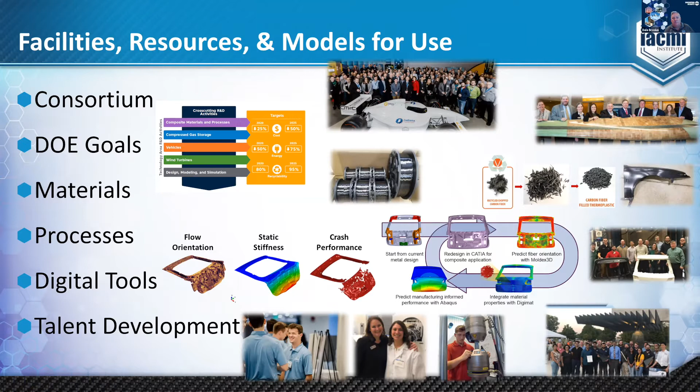We believe we're a connected community - this is the composites industry, and there's some pictures from various member meeting activities over the years. We're happy to say that we will be back in person in October in Dearborn, Michigan for our next members meeting, and we're looking forward to that. That's October 5th through the 7th, so we'll look forward to seeing folks there.

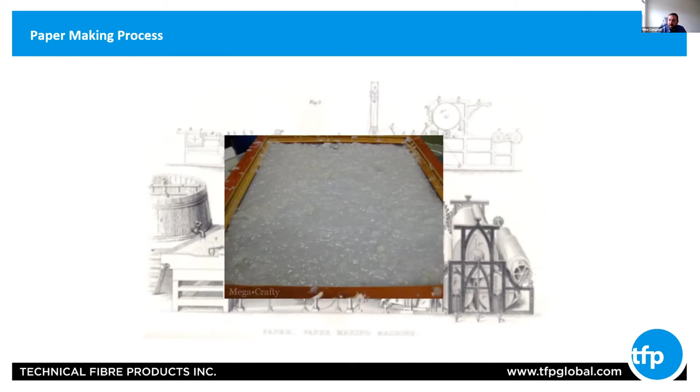As I mentioned on the previous slide, TFP was derived from a specialty papermaking company. Our nonwovens are made using a modified papermaking process. Here's a picture of pulp, a product derived from wood mixed with water - this is what gets fed into the paper machine.

In TFP's process, we have substituted the pulp for engineered fibers like carbon, glass, aramid, polyester, etc. We also use an organic binder to hold the fibers together. So that fiber, water, and binder mixture gets forced out of the head box and onto what's called the wire. The rest of the process is just there to remove water, and the last step is to reel it up. The reason I'm sharing this slide is so that you have a visual on the inputs and outputs of our process.

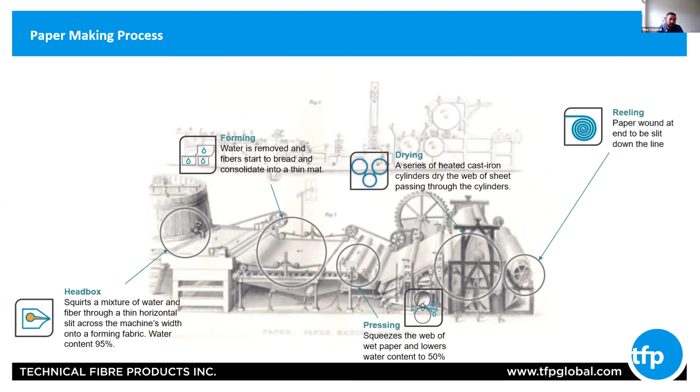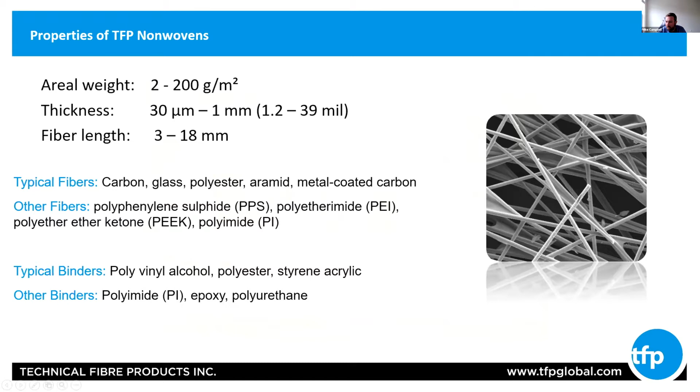So our main machine lines do not run a single product continuously. Every run is made to order. Veils are not a replacement for structural components. Due to the nature of the short fiber, the continuous fibers in the composite carry the load. In a typical composite project, our veils are in addition to your current layup to add functionality.

Our nonwovens are used in a variety of applications. Occasionally, or maybe even rarely, they are used on their own. So on a project like the Whitestone Bridge in New York, our intumescent nonwoven was adhered to the composite wind fairings with a self-adhesive backing.

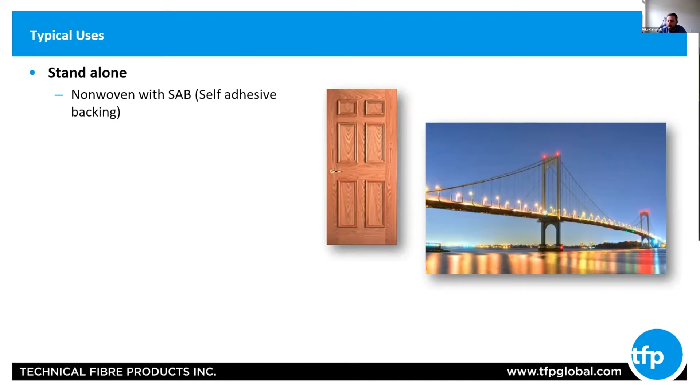Other times, our materials are coated with our customers' proprietary products. They range from adhesive resin systems to coatings used in hydrogen fuel cells. Today, I will focus on our nonwovens used in fiber reinforced plastics.

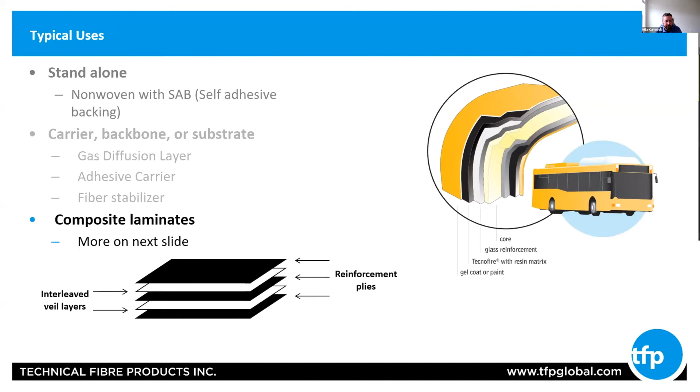So as I mentioned on a previous slide, our nonwovens are versatile. Ideally, our nonwovens are placed into your existing layup. Historically, the nonwovens have integrated well into both thermosets and thermoplastics. When utilizing a thermoplastic, we'll need to be conscious of the curing temperature. Here's a list of where our products have been successfully utilized.

All right, moving on to various functions that our nonwovens bring to the part. This is a condensed list of applications by fiber type, and I'll highlight just a few. So glass veils on the surface of a composite part provide a place for resin to evenly spread across the peaks and valleys of a woven product. Our customers use this when they see pitting or air bubbles.

Aramid is used on the surface of composite parts, not only to help with surface finish, but to also act as a protection layer. Aramid is very tough and protects from oversanding during production and from abrasion while the part is in use. Examples include the underside of an automobile, cargo containers, or pallets. On the next few slides, I will focus on intumescent and metal-coated veils.

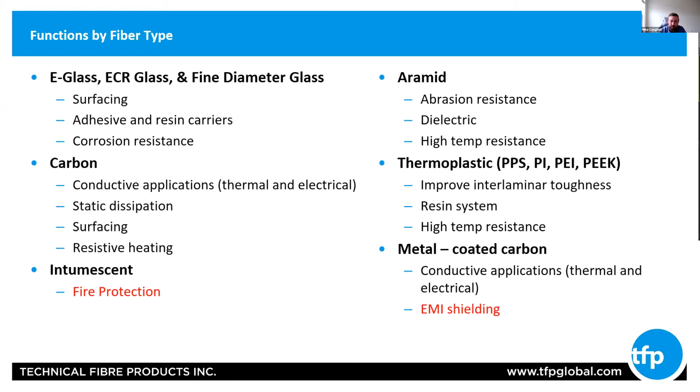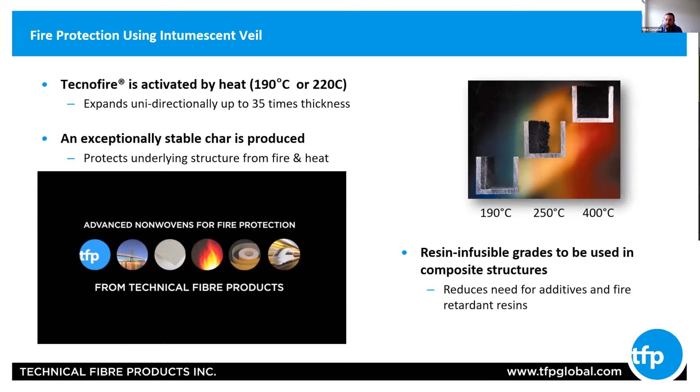All right, I'm going to start a video. Let's see if this works. So in this video, you will see a developmental product that has conductive fibers in the Tecnofire. It shows how the Tecnofire expands with heat. In this case, the heat is generated from electric current running through our metal-coated carbon fibers.

So you can see the graphite particles starting to expand here, the Tecnofire expanding. So this would be a before and after picture of Tecnofire. This char layer, as we like to call it, protects the underlying structure from fire and heat, and provides some insulation. And Tecnofire, like all of our nonwovens, is primarily built into a composite layup.

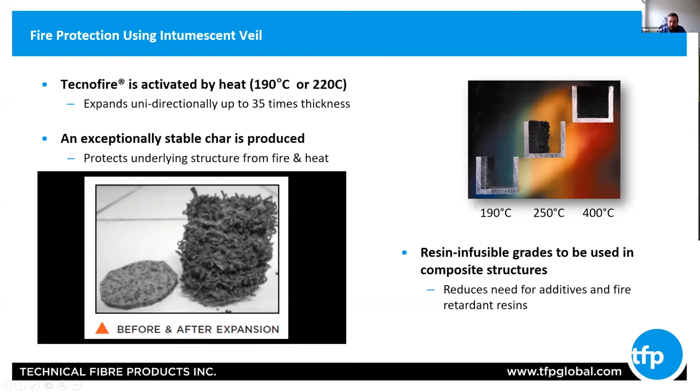So this is a commercial project where Tecnofire was added on the outside layer of a composite power transmission pole. This test here was designed to replicate a forest fire event while under load. The fire burned at 1150 C for 3 minutes, and the pole with Tecnofire was able to handle it.

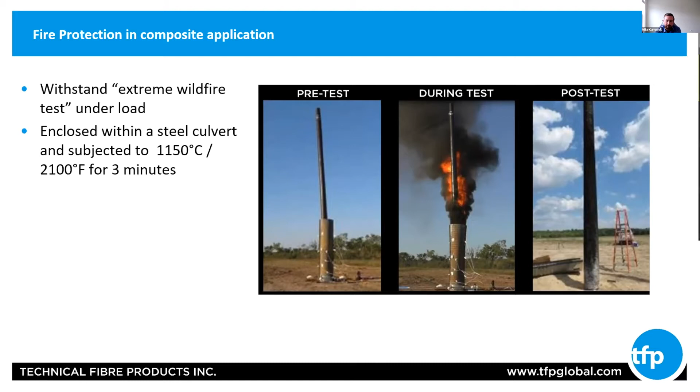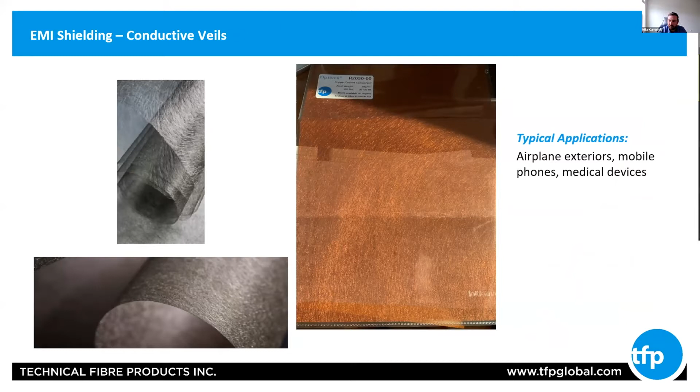In Schenectady, New York, we coat fibers with metal. These fibers get sent to our UK manufacturing plant, chopped, and used in our metal-coated veils. The standard metals that we use are nickel and copper, but we can also do silver, gold, tin, and specialty alloys.

We pride ourselves on having every single individual filament coated with metal. We do not coat our carbon veils after the fact. The filaments get coated before they get put into the veil.

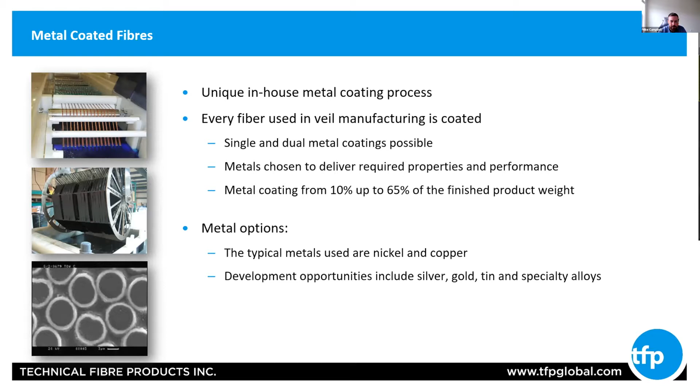So the primary application for metal coated veils would be EMI shielding for us. We are working with numerous organizations to bring a level of EMI shielding to battery enclosures. In the case of legacy battery enclosures that are typically metallic, which inherently shields from EMI, when switching to a composite, this needs to be thought of in the design process unless you're adding foils after the fact. So when working with these organizations, I'm hearing anything from 30 to 60 dB as the goal.

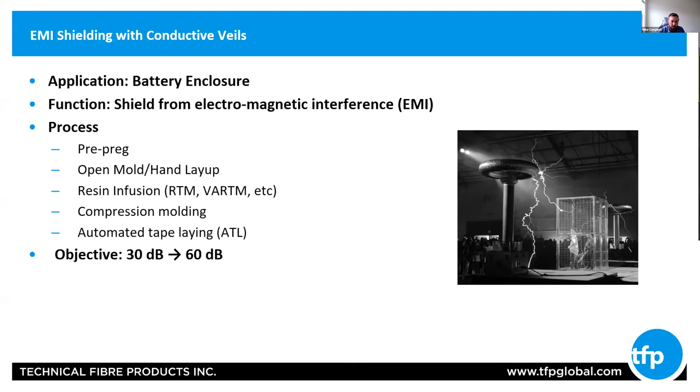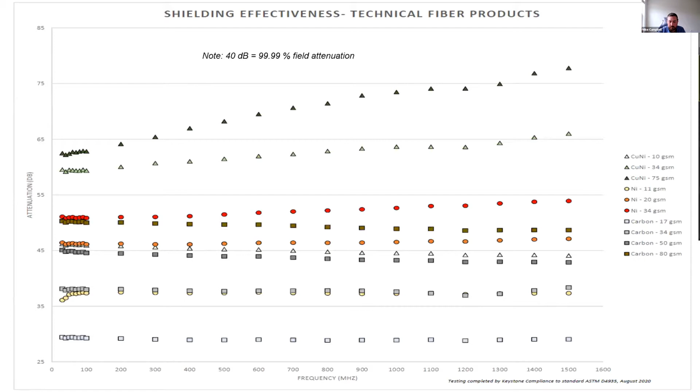All right, so my last main takeaway that I wanted to give you was that we want to collaborate. So we have a technical team comprised of highly educated and experienced chemists and materials engineers, whose main function is to work directly with our customers. We can help to identify the challenge. We can provide hand sheets in our lab for new materials. We also have a 20-inch pilot line that we can run new materials on as well.

So this here is an innovative list of concepts that we would like to collaborate on with IACMI members. So you've got resistively heated conductive veils. So by running electric current through the veil, it causes them to heat up. This could be applied to curing thermoplastics in situ, warming up the space of a passenger vehicle, or curing thermosets in a mold.

Inductive welding with conductive veils. So by placing the metal coated veil in very specific areas of your composite layup and applying a magnetic field, you could target areas to cure.

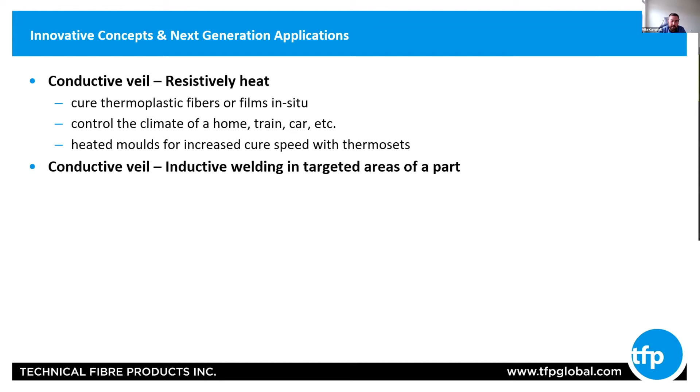Conductive intumescent veil hybrids. This would be a good example of how we can combine fibers to make a multifunctional material. Like in the video a few slides back, you could do this on a larger scale. An example of this would be fire doors in a hotel. Rather than passively wait for the fire to hit the Tecnofire and activate it, a fire alarm could activate the Tecnofire and aid in filling the gap between the door and the jamb.

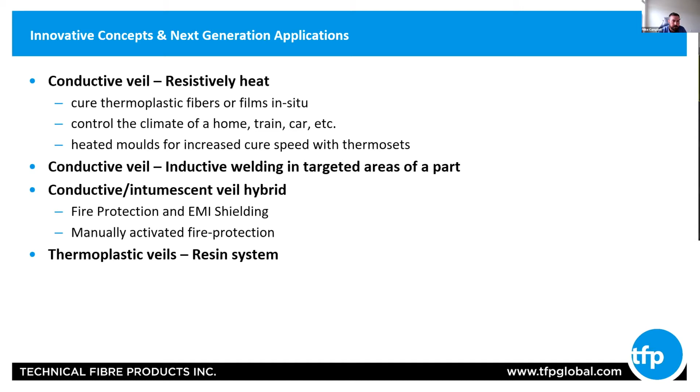Thermoplastic veils such as PPS, PEI, PEEK could be used in your composite layup and melted in place and used as the resin system. So again, my 3 takeaways for the presentation that I wanted you guys to have were: we're a material supplier, we specialize in lightweight, tailorable, functional nonwovens, and we want to collaborate.

So I had to throw in a picture here of our last in-person IACMI members meeting. This is me at the museum. All right, thanks for your time, everybody, and thanks, Dale, for having us out here. Thanks, Mike. Good presentation. I think that's you at the exit of the original Air Force One. It is, yep, at the Air Force Museum in Dayton. Great exhibit.

So a couple of minutes for questions if anybody wants to put anything into the chat, but I have a couple that I've generated. On the EMI shielding, where do you place the veil? Is it in the middle of the laminate, top or bottom of the laminate? Where's the best place to put it? So I think that'll come down to how you design your part, but at a coupon level, it should not matter. And we're actually doing a lot of testing here for some webinars and conferences in the future.

And unfortunately, I didn't have all the data ready, but we're proving that the veil in a composite, out of a composite, and in different layers of the composite, it is actually irrelevant from a coupon level. But when you're designing a part, you may need to think more about how you connect the veil to your gaskets or other parts there to make sure you have a fully enclosed Faraday cage.

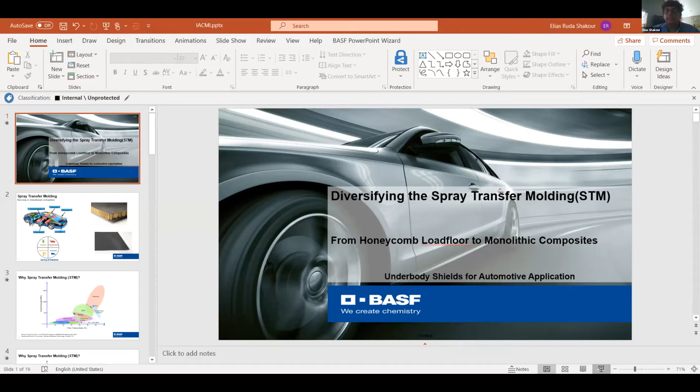Hey, thank you, Dale. Can you see my screen? Yeah, just put it in the slideshow mode. And yeah, just give me a second. How does it look? Good? You see it? Yes, looks good. All yours.

Good afternoon, everybody. My name is Elias Shakour, as Dale mentioned, and I work for BASF here in Wyandotte, Michigan. My background is in composites, so I represent a team that works in lightweight composites, mainly for structural and non-structural applications. My own focus is in the polyurethane application, but I have a colleague who works in the thermoplastic application, so we cover both sides.

Today, I'm going to talk about an application that is well known in the honeycomb load floor. We call it spray transfer molding, STM, but we're extending this application into the monolithic side of it, which means taking it to make more composite parts, where we see there's a big advantage for the high throughput that can make the integration of those parts in the automotive industry much easier than other processes. And I'm going to focus more in depth on underbody shields for the automotive application, where we have a partner that we're working with.

Now, with spray transfer molding, when we started, we were focusing on automotive and mainly load floors. But when we started to investigate more, we built a prototype lab here in Wyandotte that I will be introducing to you. There we looked into what else we can do and what kind of industries we can serve. And we believe with this technology we can serve several industries such as transportation, consumer, construction, and industrial, taking it from the honeycomb load floor in the upper pictures, which is really nice, high stiffness, high strength, to more of a monolithic composite part with structural application.

And it is important to mention that this technology, as I will show you in a minute, has an advantage of low cycle time. And that's the big advantage. I can have part to part within 60 to 90 seconds. And that's where we think this technology can be a good fit, comparable to high pressure RTM as well.

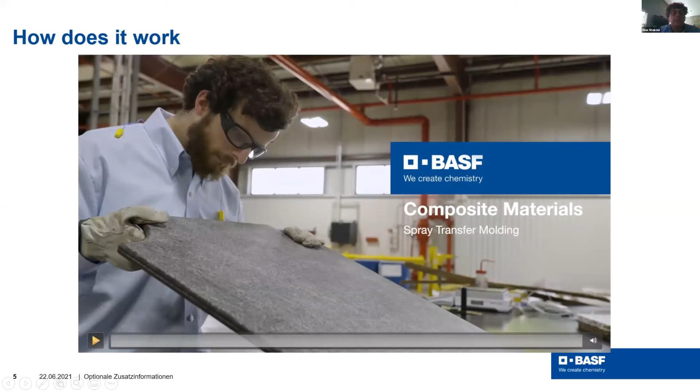Now, how does this technology work? Let me walk you through this video. This is a lab here in Wyandotte, Michigan. This lab is open for our customers to come and bring their tool or use our equipment and our tools as well to make parts and then go to the OEMs and get their business.

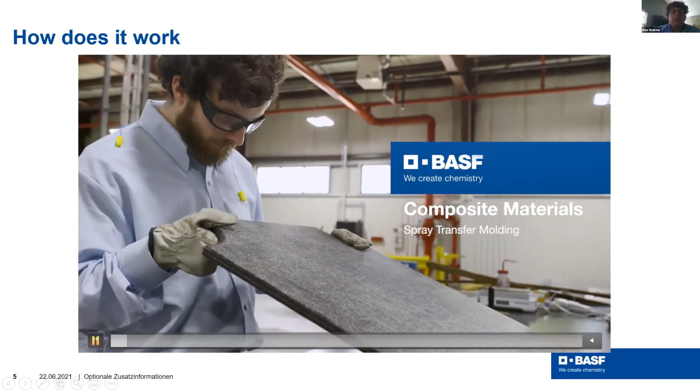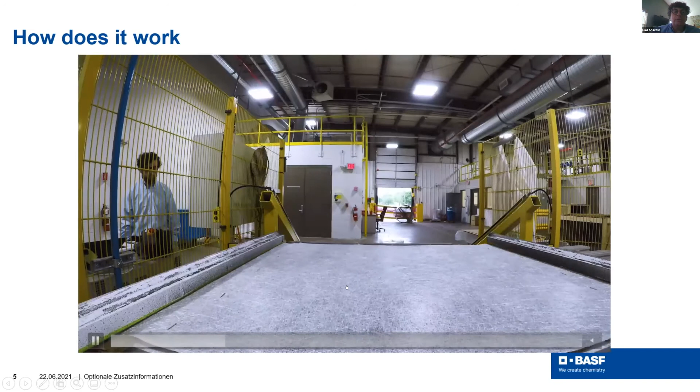So it is open for everybody to come in and utilize the equipment. This technology, let's go back now. This starts with a corrugated, could be paper, and then we add a glass fiber to it. It could be carbon fiber, it could be natural fiber where we start to use that. We make a plank out of it where you see the core, and then we write a program to localize where we want to spray. And that's the beauty of it. I don't spray places I don't want to spray on.

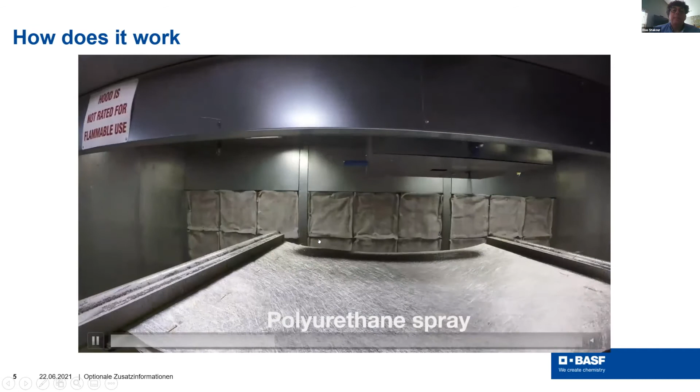And if you notice, I'm going to pause it for a second. I'm spraying in a 90 degrees. That means I'm not distorting the fiber orientation. In this case, this is a glass fiber, chopped glass fiber. But think about if I have several layups of 0/90 or quasi-isotropic material, I don't want to distort that, like similar to what happens in high pressure RTM. Here, I am spraying in high atomized pressure on top of the glass fiber, which I really localize the impregnation very well.

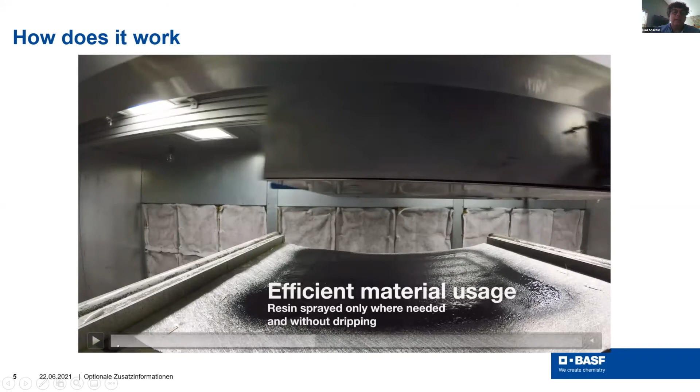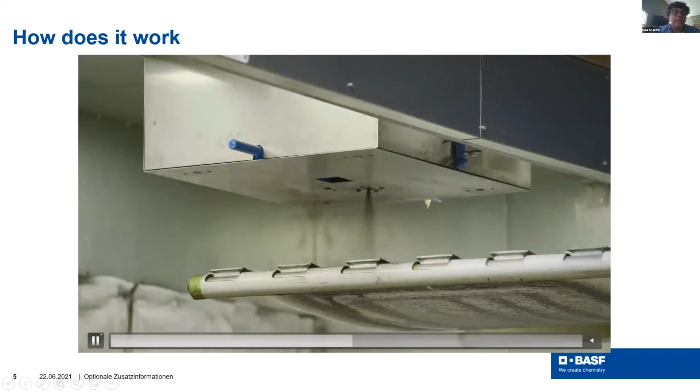I just want to say, on top of there, if I want to add more glass fiber reinforced localized, I can add that into the stream of the urethane, and it will stick to it, and it will be more localized into the glass fiber. Now I'm kind of creating here a pre-preg. As you see, we spray on both sides. In the industry, they spray both sides simultaneously. Once we complete that, this is about 20 seconds on 1 meter square parts. Then the robot will take it to the mold.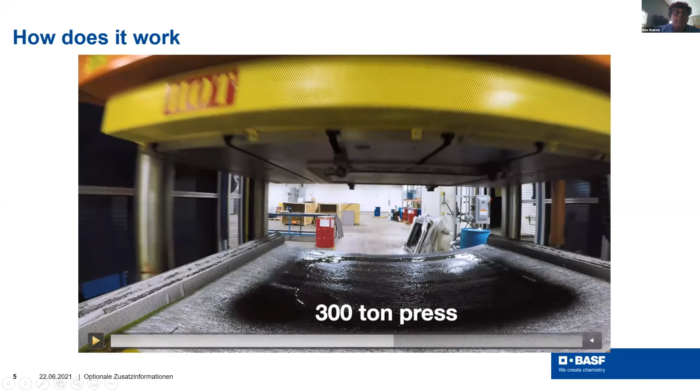And in the mold, we can add auxiliaries such as inserts, or I can put a veil or anything else. All will be fully integrated in the tool itself. And this will be in one cycle. We can accomplish having inserts, veil, or in-mold coating, and trimmed all at once in one cycle. And the tool is like the cheapest tool, because we don't need to heat it, similar to injection molding.

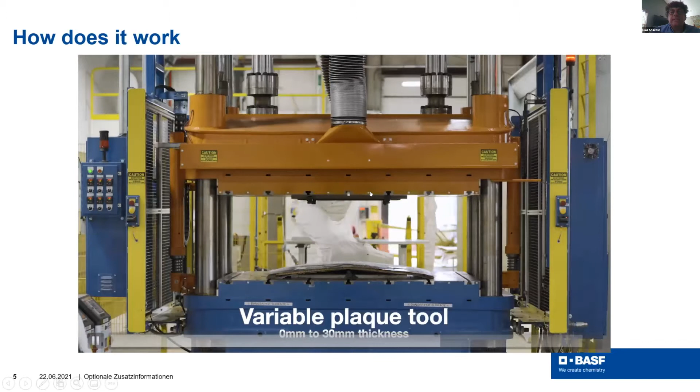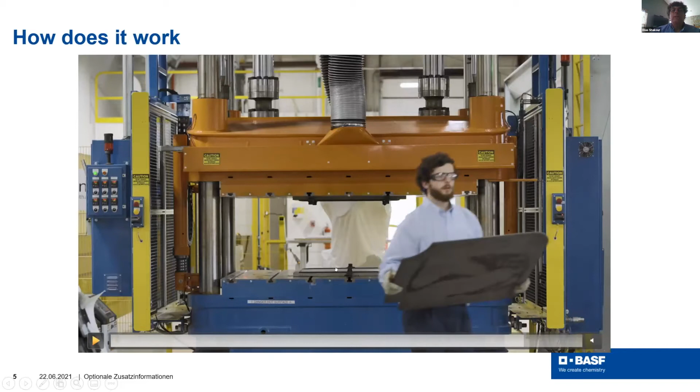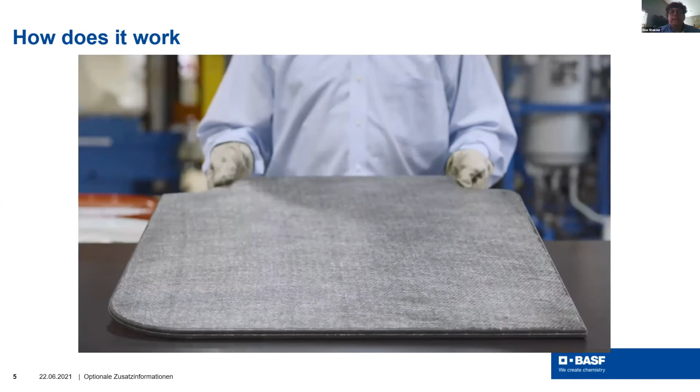As you can see how simple the tool, this is a heated platen, it closes, and by end of that cycle, demold, you will end having a finished part. So that's the beauty about it. It's fully integrated, so you can add several features in the mold and get a completed part. So this is like the traditional honeycomb applications. Now to go forward with that, what can we do? This is well known, as Dale one time told me, but we are extending this application.

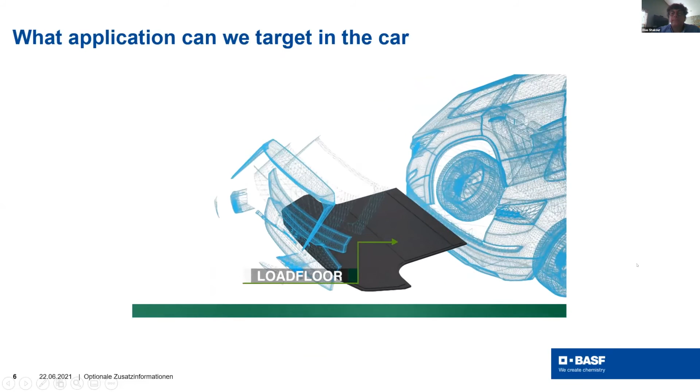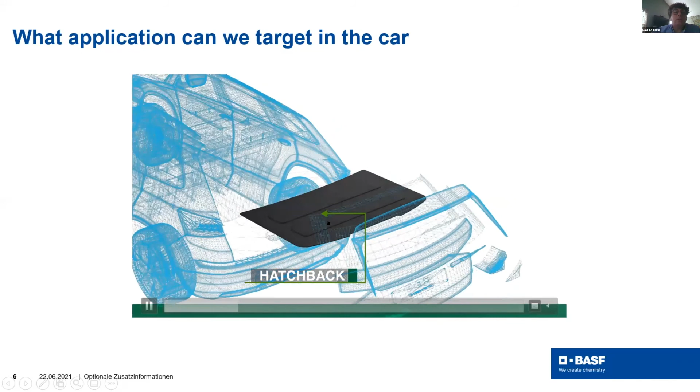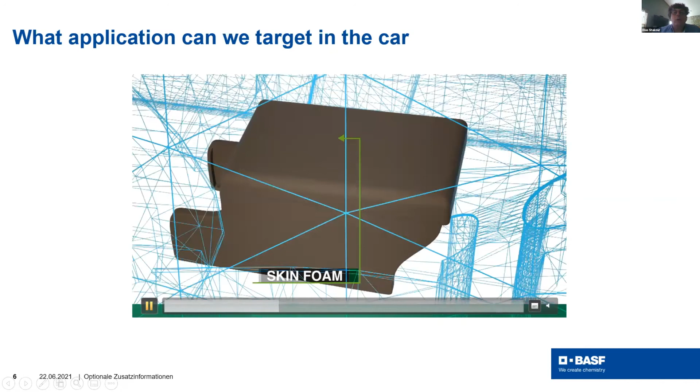So we did a roadmap, where can we apply those kind? This is where the honeycomb application comes in, but I want to show you more of the monolithic. As you can see, we can start from the load floors. This is the tradition, what's in the industry right now, and there are lots of customers and big volume. You can do the hatchback, that's a monolithic, or you can do it with the paper core. Center console, we are working with customers right now, and this could be natural fiber from jute, bamboo, or flax, with a core or without a core, and we can add skin foam to it as well, all integrated in the tool, but multiple steps though. Sunshades, this could be an option.

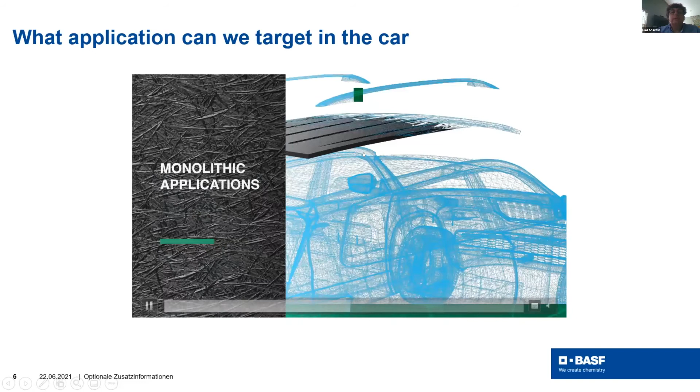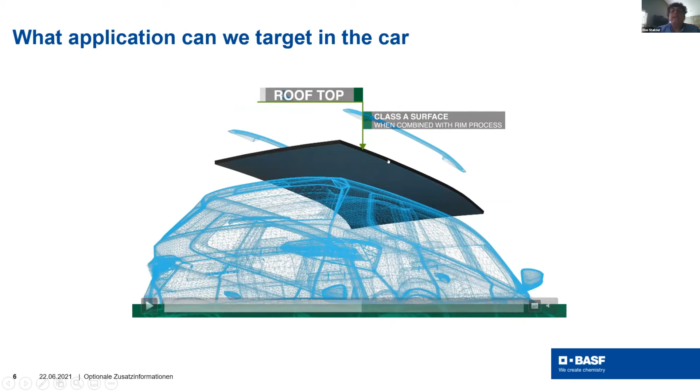Now, the next one is the monolithic. That means we take the core out. So you can do the rooftop. And I want to stop here. With the rooftop, you also can add veils on top, as mentioned, and we can combine it with the RIM process, so you can have different colors and be ready as a class A to paint if you want to paint that as well. Fender liner, that's another option.

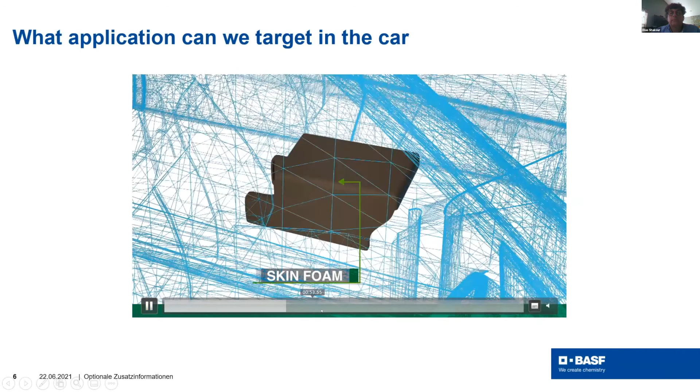And you can see here, oops, what did I do here? Sorry about that.

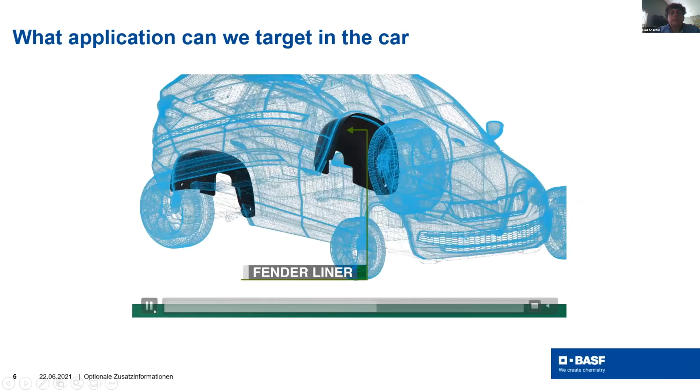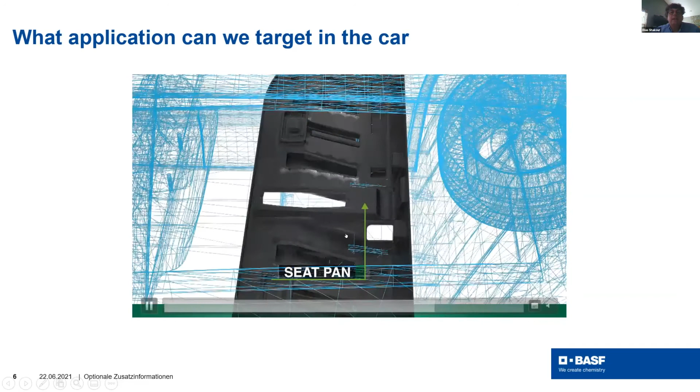So as you can see here, we're going into the extreme of, you would say, oh, that's a very complex shape, but I will show you the parts that we're making, and we can do that. Also door panels and door modules, that's easy to do. And it's lightweight, strength, everything. And we are working with customers on that. Seat pan, we have done that in Europe with BMW. And today I'm going to talk about the underbody panels and skid plates.

So this is another opportunity, and we're working with the customer tier 1 on that, but we're serving several OEMs on it. And this is a big opportunity for this technology. So eventually, if you can see it, we're taking that technology and we're stretching it to be more into the monolithic, but we're going to the exterior parts of the car. And that's where we think there's more opportunities.

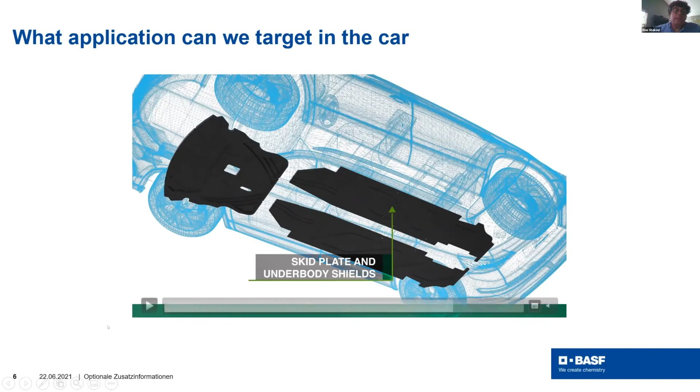We made this video, but we didn't add also in the battery side, and we have also been working on the battery cover and battery top for using this application as well. So all in all, we think this is where this application can be done. Some of those parts that we are talking about, we are making them for OEMs, and some of them we are still in the investigation mode, but all those are potential.

Now, if I want to go forward, let's focus more on the benchmark of the underbody, and this is work in partnership with the tier 1 CIE group here in Michigan. They're in Shelby Township, but they have an OEM customer, and they already identified the customer and are working on the part with them. So to start with, for the underbody, we did a benchmark or roadmap using A2Mac1, and we looked at all kinds of underbodies available.

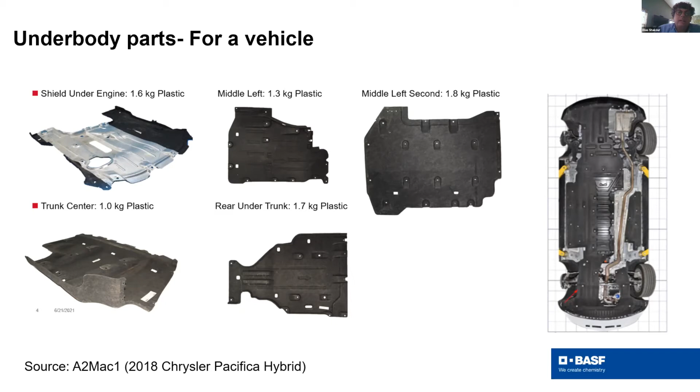And we found out, this is an example for the Pacifica. It is quite heavy sometimes. And not only that, if you drive on the highway you might see some of those underbodies thrown on the side of the road, because with the vibration, the joints there tend to break fast, and there are some issues. So we thought, if we want to go after this market, we have to provide a higher strength. Not only that, it will be a lighter weight.

So for this work with our customer CIE, we started with a coupon size, and then we will expand that to a prototype part. So we started by utilizing a polyurethane system that has the highest biorenewable content in the market. And we tried to go to the thinnest possible part we can make, which is 1 millimeter. And we did all the mechanical performance for that. So first of all, we were successful in making such a sheet, which is out of 450 gram per square meter of glass fiber.

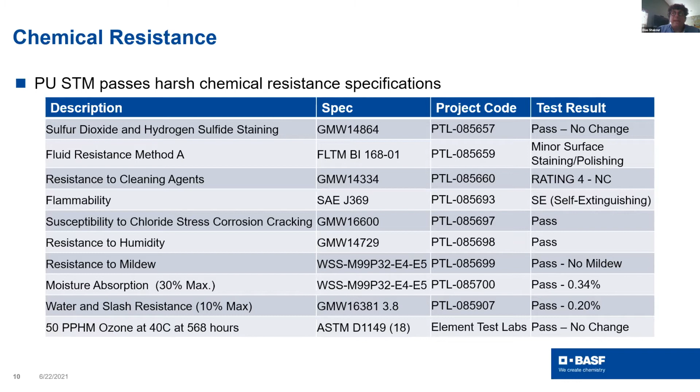Not only did we do the mechanical performance, we took all the specs that the OEM provides, and we did the chemical resistance for it. Those are the GM and the Ford and some of the foreign automotive specs that we all passed. That means all the specs passed the requirement. We did also gravelometer testing and also NVH testing. All of this is under the compliance of the specs that we received from the OEMs.

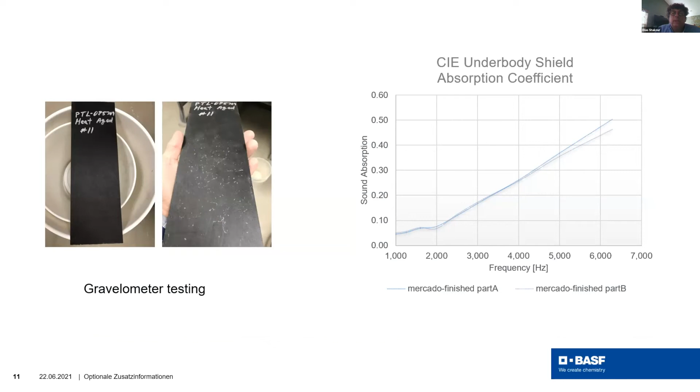We did different DOE studies, and we looked into what kind of glass fiber is needed for different impacts, to increase the specific energy and the impact energy absorption, and compare it to the carbon steel as the control. And you can see from this graph, 5 layers, 4 layers of 0-90 can really be a good fit to replace steel as well.

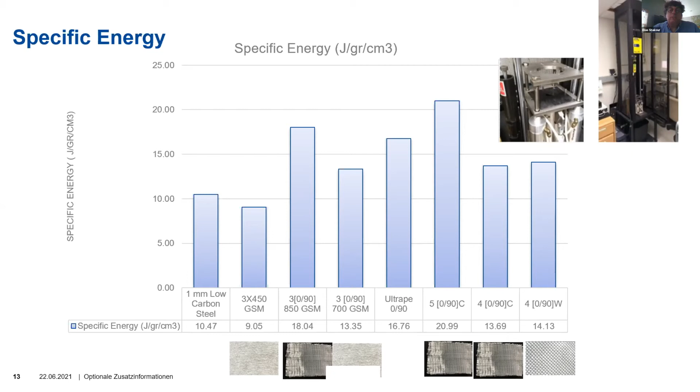Now, with all the specs that we have done and passed, now it's time to really work on the prototype. And this is the lab here in Wyandotte, and it's open for our customers. Please reach out if you are interested or you have a project in mind. We also have good CAE simulation skills with our groups so that we can identify how to optimize the design.

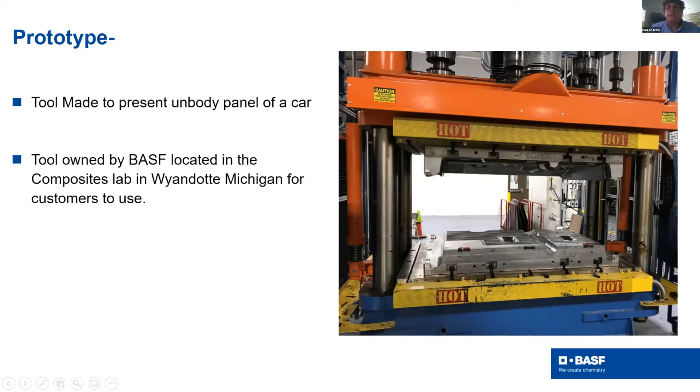This is a tool that we built. It is large, it's the maximum tool we can have in our press. It's about 1.7 meter in length and 1.5 in width. And you can see it has lots of geometry, and it has a corrugation. So it could also represent a truck bed as well, but it also has some features that you will see like trim edge and so on.

Once we completed, this is a complete part. And as you can see, it's so beautiful, because we really modified the spray to impregnate on those edges. You can see how it is well trimmed on the trim edges. This is all in one cycle, and that's the beauty about that. You can get the high strength.

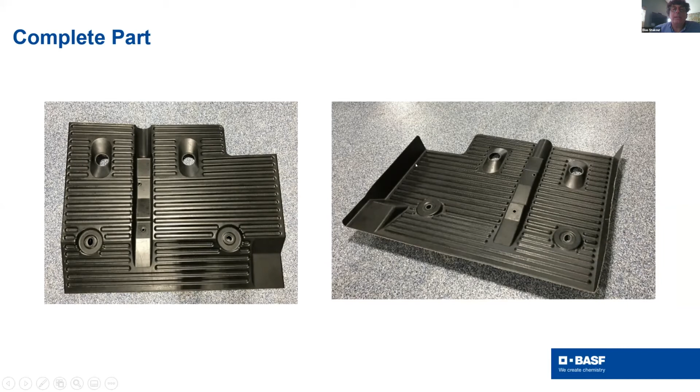Add feature into it, and yet get one cycle. With that, this is a big part, and you can see it has a complex geometry, lots of geometry features in one cycle.

As a conclusion, STM, spray transfer molding, is a good technology to manufacture structural and semi-structural composite parts. Eventually we introduced this technology to fit where high pressure RTM has long cycle time. We reduced the cycle time to 60 to 90 seconds.

So we're offering that as an alternative. We can make large parts, as I told you. Thickness varies - we were up to 5 millimeters without any problems. I just want to tell you this is a good technology for 3D geometry.

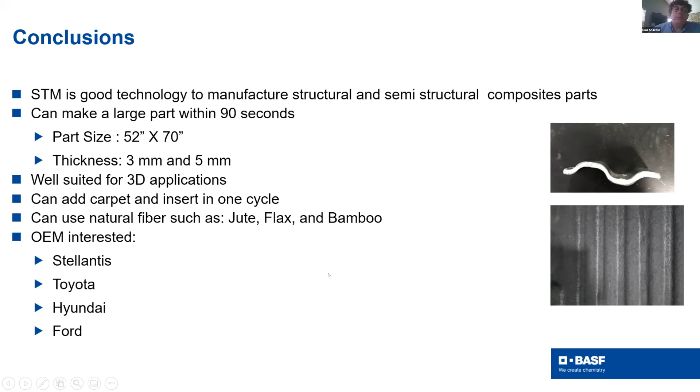From the lower picture here, you can see I incorporated a carpet, so you can add carpet to it, and that's for NVH. Or you can use like jute, flax, or incorporate even bamboo if you're interested. Who is interested, and who are we working with right now with the OEMs? Stellantis is one of them, Toyota, Hyundai, and Ford. Those are the target OEMs that we're working with through our tier, of course.

With that, I would like to say thank you, and I'm open for your questions. If you have any interest in visiting the lab, please contact me, and we can arrange for you to come and visit the lab if you're down here in Wyandotte, Michigan. With that, I would say thank you.

Thanks, Elias. Yeah, really interesting there. This technology's come a long way from where it used to be, simply for load floors and honeycomb panels.

Yes. So, one question I have - you didn't address this. You obviously talked about glass mats, and you talked about natural fiber mats. But what about recycled carbon fiber mats? Have you done any work in that? We did a lot with our tiers, and yes.

Funny enough, we started with the traditional polyurethane, but because of the nature of the recycled carbon fiber, we developed a new polyurethane that impregnates that very well. So we did that, we work with that a lot, and we have some data with them.

Okay, very good. What about thermal performance? What temperatures can you go to? I mean, do you have formulations that are e-coat capable or not? Or is that beyond the scope?

No, actually the system itself goes to 170 degrees TG. So it is e-coat capable because we're targeting exterior parts, and 170 TG is enough to hold an e-coat oven of 200 degrees for 20 minutes. It passes that. The tool itself is heated to 200, 230 degrees Fahrenheit, and we can adjust that based on different veils.

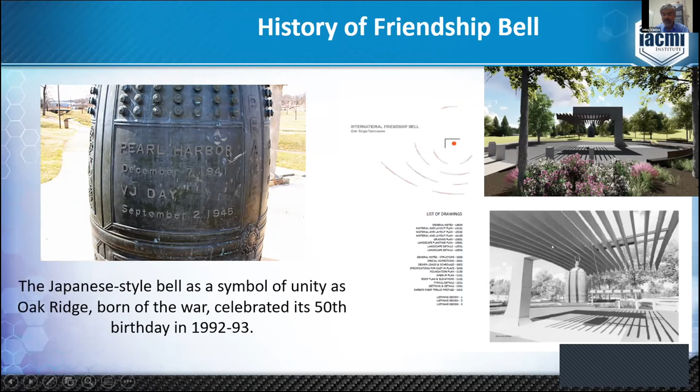And I think in some meetings up at the top level, they decided this has to be carbon fiber beams. And then we were pretty much told, hey, you are producing carbon fiber beams. So that's the history of this whole thing.

So the unique thing from an engineering standpoint is each of these beams is 33 feet long, and they're like 36 inches in height and only about 3 inches in cross section. So they're very sleek and slender, but they're very, very long, like 10 meters long roughly. And there are 17 of these beams that make up the entire structure. And this, I'll show you some images.

These beams actually mount onto a superstructure. The unique thing about this is the arc radius of each of these beams is different. So if you look at, there are 17 beams, and this is an example of like B1, B2, B3 up to B17. But this radius at the bottom here is different for each of these beams. So the idea is when they come together, they look more like an arch from looking up towards them. I mean, architects have funny ways of looking at things, but then they kind of came up with this idea that this will be the visual, how it will look like.

But being that they are different radii, no single one mold would obviously be able to produce these. So we looked at a lot of the paper exercises on what may work. For example, we considered pultrusion, but the beam had varying arc radius, so pultrusion was not an option. Hand layup would be possible, but it was not very practical. RTM would be a possibility, but each beam would require a unique mold. Filament winding would have been too expensive. VARTM by itself would be a laminate, and solid laminate would be too heavy.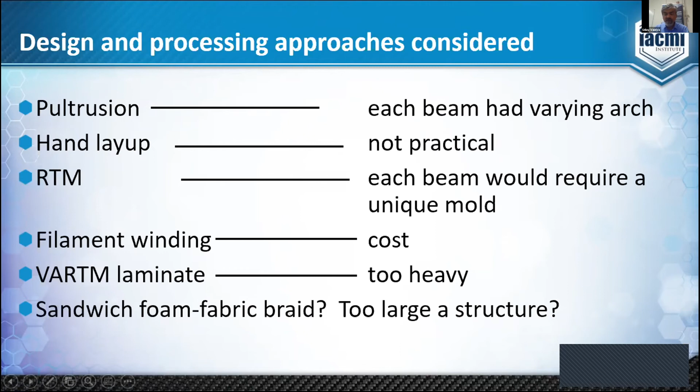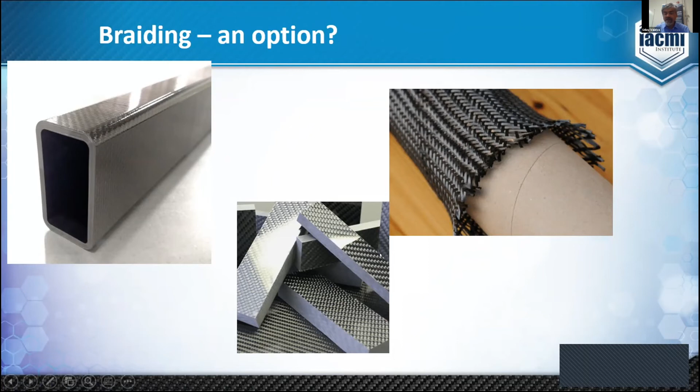So we realized that it has to be a sandwich design, and in this case we gravitated towards braiding. In these things, the customer has very little idea around composites. So in terms of customer education and getting their buy-in, and who will stamp the drawings, there's a lot of issues that come about. So we had to produce a lot of coupons and touchy-feely things that kind of help the customers realize what these things look like, what the weave means, and how can you shape it, and so on. So this kind of exercise took some time to get their buy-in.

So the concept here simply is that it would be a sandwich structure. It would have basically a foam core that would capture each radius of each beam. And then the idea is we would overbraid these with the unique overbraiding technology, therefore producing a continuous but very stiff and highly durable structure. And the fact that these are double cantilever, so they're free floating beams, means that the core where they are supported would have to have a higher density of foam. And then as they go gradually outwards, like an aircraft wing, they would have lower density as you go from the center out. So in concept, that was how we had conceived the design would work.

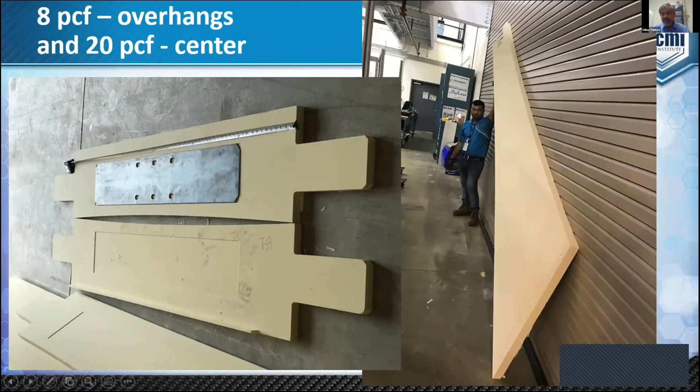So these are images, I'll go quickly because of time, but if you look at the center beams, these center sections are 20 PCF foam in which we actually pocketed out slight pockets to hold a steel plate that would have the holes through which the connections would pass through. So the two halves mate together and this becomes the center section. This on the right side is the 8 PCF version that basically marries to the center section. And this is the long section out here, so it's much lighter density foam. These are about roughly 3 inches in thickness.

The braiding itself, overbraiding, is unique technology here. Braiding is common in general, but braiding such a large structure in a continuous way was where some of the challenges were.

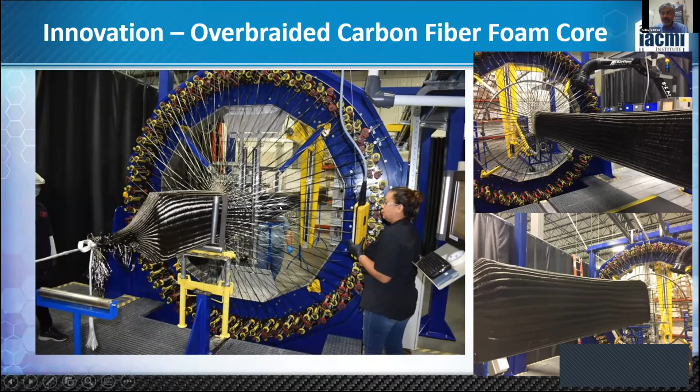So we collaborated with Highland Composites at the time and looked at ways of continuous overbraiding. These are some images of the foam passing through the braiding section. I'll try to play this video.

So the foam continues to advance and the triaxial braid continues weaving around this structure.

So you get the idea of how these preforms are produced. We had to do several adaptations to the braider itself in order to guide the foam and center it. A lot of small details here, but they provide a very unique way of braiding these. These are examples of the finished preforms.

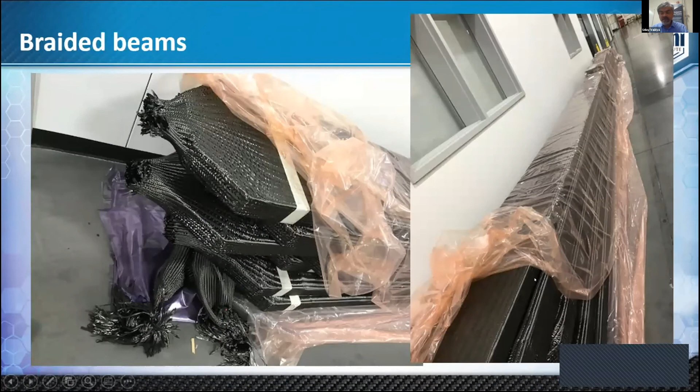We produced close to 20 to 25, where we made a lot of mistakes in a few, but then these preforms were staged and would go through the vacuum infusion process.

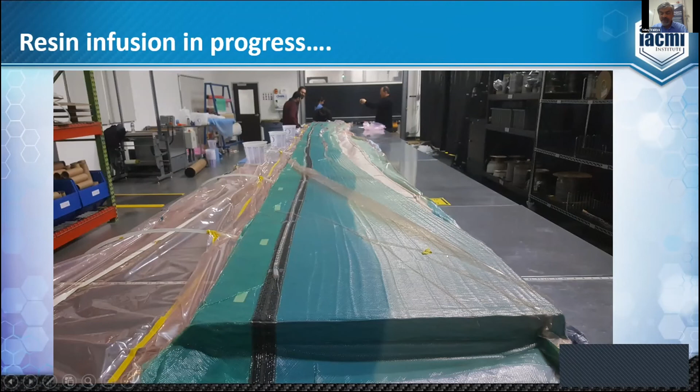In a single step process, we were able to infuse this in about 20 minutes per beam. Very fast infusion, but the layup does take much longer than that, of course. We were able to get full consolidation and wet out through the infusion. This is an epoxy resin used over the braided architectures here.

So the composite beams, about 15 PCF at the end, weigh about 200 pounds. Try doing that in concrete, lifting these two — obviously a huge difference. And if this were made out of wood, it would be about 500 pounds, more than 2.5 times that of the composite beam.

All the beams were staged and produced, and all the flatness was checked because the top of these were flat. These are essentially all unfinished at this stage. They had a taper on these sides, and you can see the mark of the taper out here.

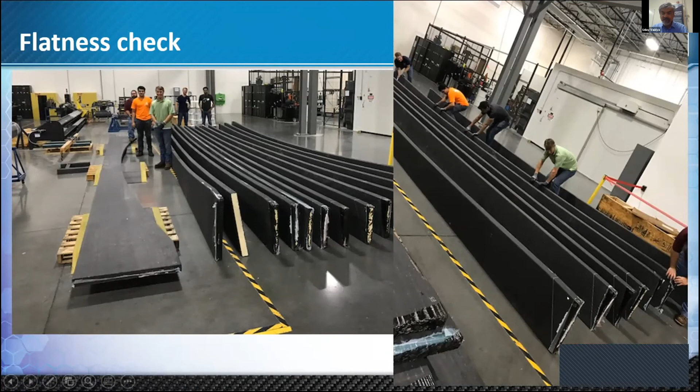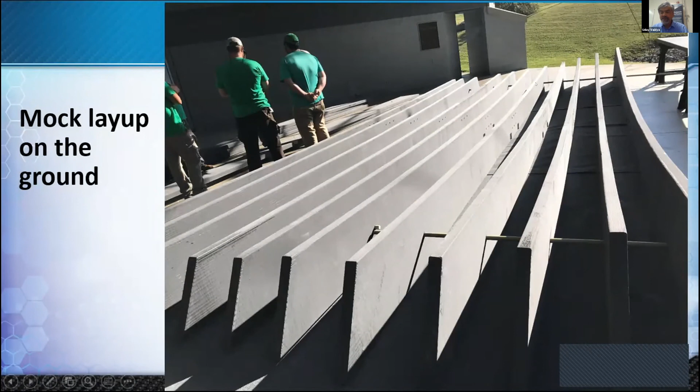Finally the beams were finished and brought onto the site. They were placed upside down first to check for alignment, because this rod would connect all of them and pass through it. This is the same on the other side. So this check had to be done on the ground.

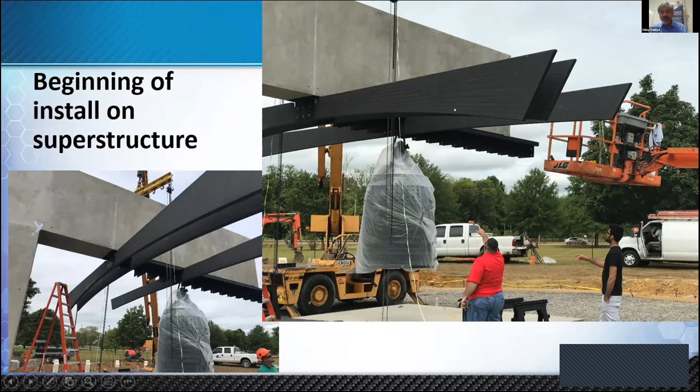As the beams start getting mounted, you can see they're located in a very unique position based on their arc radius. The bell is positioned right in the center. This particular L-shaped structure holds 8,000 pounds for the bell, with very light beams that hang over it at the end of the day.

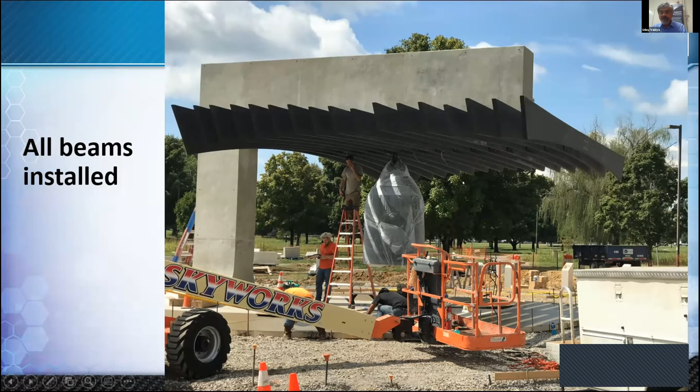So this is kind of how the complete assembly would look like at the end. This was done in September 2018 — can't believe it's been that long.

This is the finishing of the base of the structure. You can see they're fully free floating, only connected in the center. Each of the beams, after they're installed, the base was left half complete with half circles, essentially to symbolize the unfinished circle of life. This was the architect's version of how they would demonstrate this to the community at the end of the day.

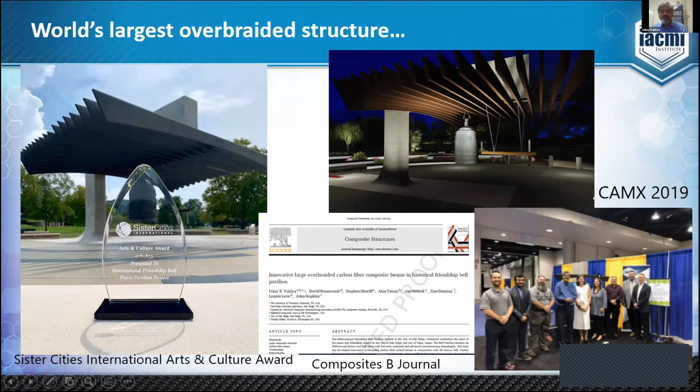This, I must point out, was fully done through student support, with about 20 students spending 2 months back and forth with Highland. David Branscomb, I do want to acknowledge him greatly. This was a unique application for us, but because of huge involvement, IACMI providing the student enabling support was very significant. This won the Sister Cities Award at Houston, won the CAMX Award for Most Creative Design. We have published this work as well lately in Composite Structures Journal.

And this kind of is the opening ceremony. I'll play this, show this.

So that's the architect Demian Wilbur from Washington, and this is the ringing of the bell ceremony actually.

So, and then that was the proud moment for us. So that's a brief on the bell itself. I thought it might be of interest to see. And really John Hopkins and Robin Page, Jared Blue, they enabled a lot of the support that goes into getting these kind of things approved, but DOE's help was greatly appreciated.

So recently our team, like Alex Stiles, a student in our team, has partnered with architecture to build freeform architecture, 30 feet tall towers made through additive manufacturing with a combination of glass and carbon fibers here. And this particular design is fully modular. The base was 3D printed on the BAAM system, but the rest of the structure assembles like a jigsaw puzzle.

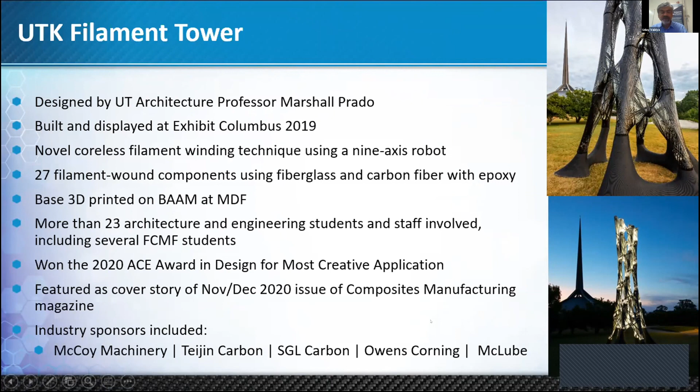And it was shown in the exhibit in Columbus. It also has been shown at CAMX, and won the 2020 ACE Award for the most creative application at CAMX. A lot of industry partnerships here through such projects. So that's a very quick snap through.

The last thing is the large scale structures going on in collaboration with Oak Ridge on the building side of things. So there's a lot of effort in terms of BAAM printed tooling for concrete casting, and then looking at rapid construction technologies. So this is an activity in San Francisco, and essentially you can see all these modular elements were printed or made through printed tooling.

Like you can see the tool is printed here, machined, the mold is created, then the casting is set up, the concrete is cast, and then precast parts are produced. And these have been demonstrated to go into building construction. So I think IACMI collaboration and some of the partnership is enabling some unconventional uses of composites in large scale structures.

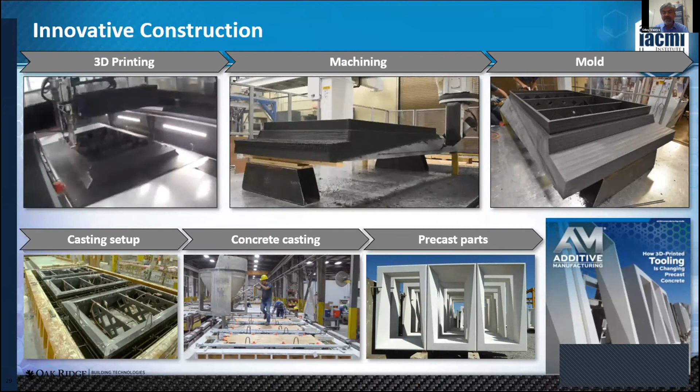So thank you for your time, and Dale, I'll stop there. Thanks, Uday. I thought you were going to maybe get to that slide on the Raiders torch, but... No, actually, I somehow missed that one, but you can talk about it if you don't mind.

Well, I don't have it in front of me, but yeah, one of the world's largest 3D printed structures now is the torch at the Raiders Stadium. It was printed on Thermwood machines out in Kansas City and then assembled in the stadium. And it's the Al Davis torch. It uses laser light instead of a real flame, and it's, let's say, 86 feet tall. It's a pretty nifty architectural achievement.

So I'm sure people who watch NFL football would have seen it, but if you haven't, when you look at the Las Vegas home games, take a look for that thing. But that's 100% 3D printed.

So one question here. For the braiding, does the fiber tension allow it to conform to the changing shape, or is it more complex physics than that? So is it the fiber tension that forms it around those changing perimeters? Yeah, that's a great question. Sure. So, you know, very much so the tension control on the fiber is very critical.